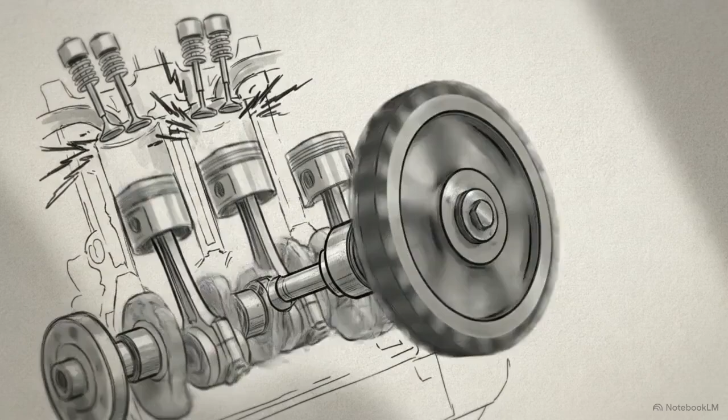For decades, automotive safety relied on cause and effect. A metal gear snaps, a brake line ruptures, the machine seizes, and a crash follows. Engineering standards, specifically the widely used ISO 26262, focused entirely on this chain of events. The logic was straightforward: prevent the parts from failing, and you prevent the accident.

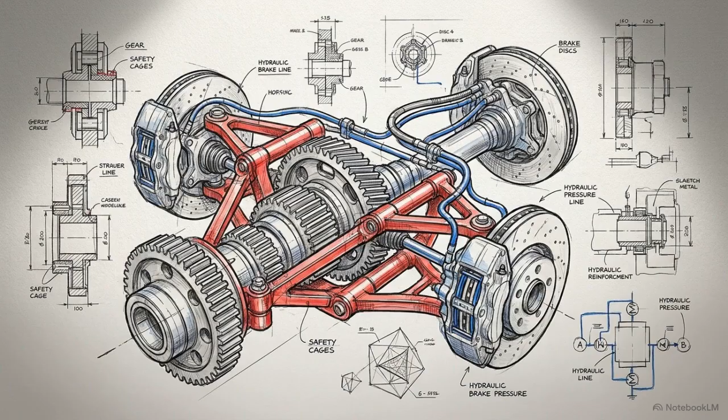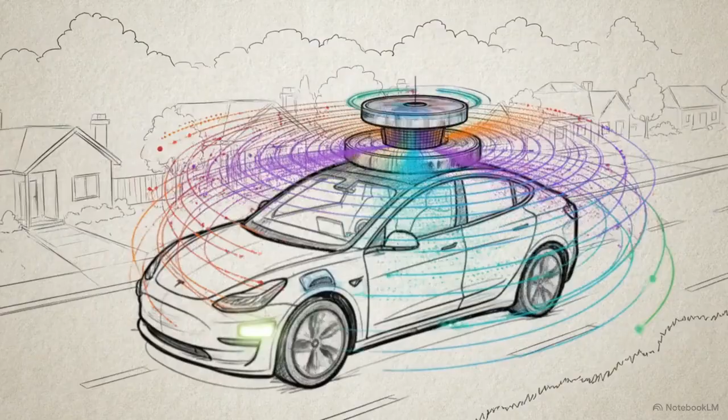But put an autonomous vehicle on the road, and that logic falls apart. You can have an engine in perfect condition, cameras streaming pristine 4K video, and LiDAR arrays spinning flawlessly, yet the vehicle still gets into a crash. Zero mechanical faults, zero electrical faults. The old rules of automotive safety simply cannot explain what went wrong.

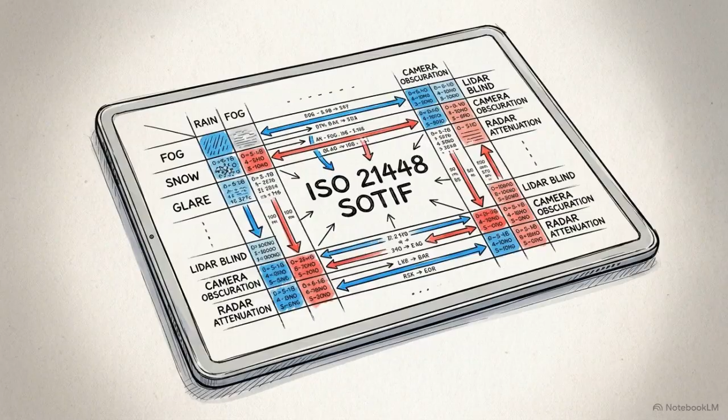This gap in logic required a new framework, called ISO 21448, better known as SOTIF, the safety of the intended functionality. SOTIF is designed specifically for situations where a system works exactly as engineered, but still fails due to a performance limit or an unexpected environmental trigger. Autonomous safety relies on ensuring a mathematically perfect system survives a chaotic, unpredictable reality.

SOTIF relies on a verification and validation framework, operating as a continuous cycle. Verification is defensive, proving the system handles known risks, like slowing down in rain. Validation is exploratory, using real-world data to hunt down unknown risks.

Whenever validation uncovers a new hazard in the real world, that data feeds back to the verification side to become a new design requirement. The entire framework operates as an ongoing search and rescue mission, systematically finding dangerous unknowns and transforming them into safe, manageable knowns.

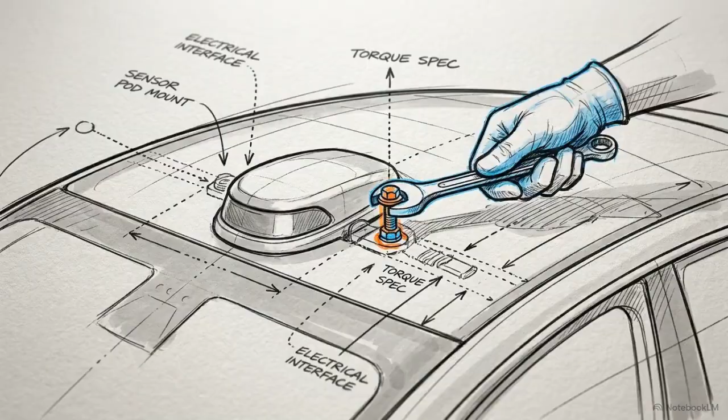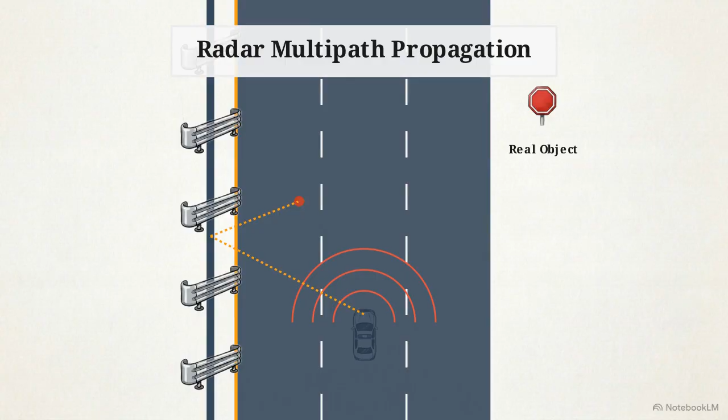Finding those unknowns requires testing the physical hardware. Every sensor on a car, whether a camera, a radar system, or a laser, is bound by the laws of physics. This diagram shows radar multipath. A radar wave bounces off a metal guardrail and reflects back. Because the signal took an indirect path, the computer hallucinates a ghost target in its own lane, triggering phantom braking.

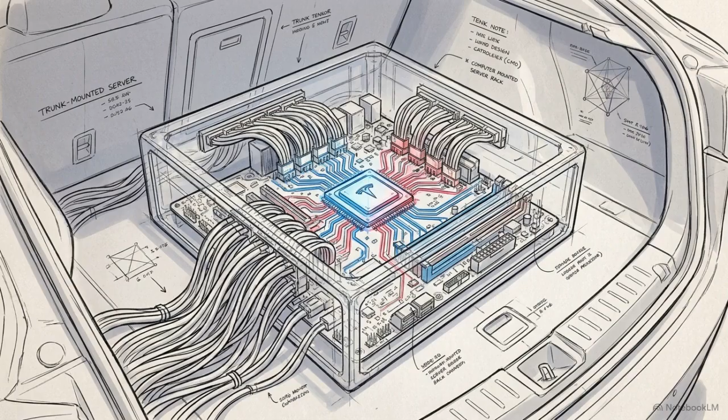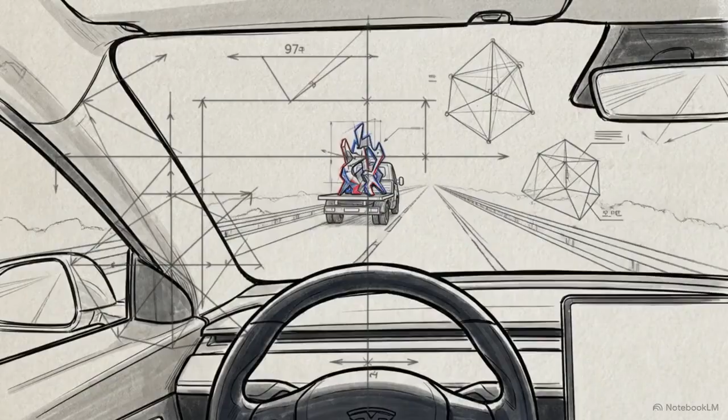These hardware limits are compounded by the AI software interpreting the data. Machine learning models are highly vulnerable to what engineers call confidence pitfalls. An AI might state with 99% probability that the path is completely clear, but if the training data lacked that specific rare object, the high percentage doesn't mean the computer is correct. It just means the computer is highly confident in its own mistake.

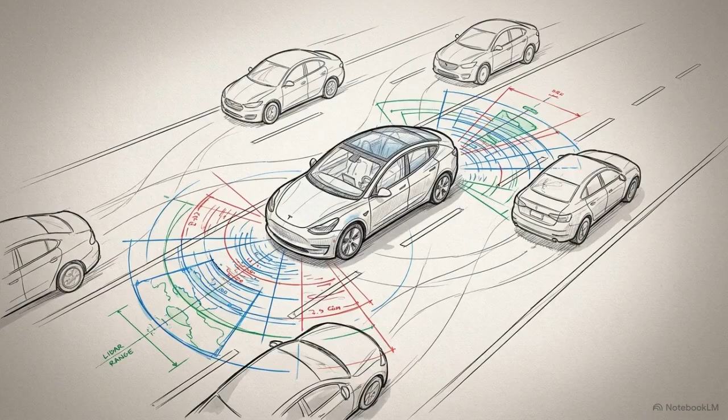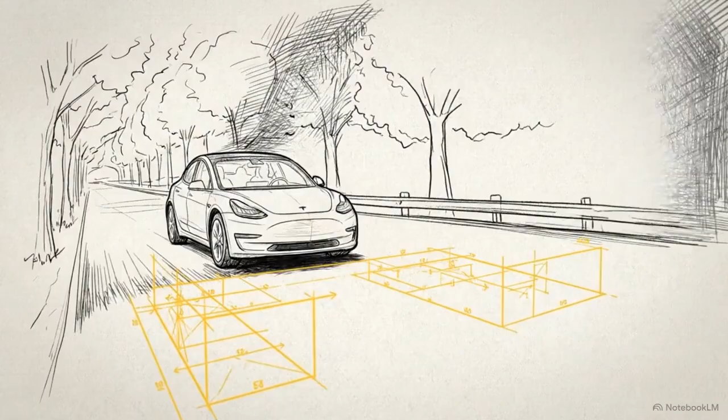When you combine bouncing radar waves with overconfident algorithms, the greatest danger to an autonomous system is its own misinterpretation of the physical world. To map out these misinterpretations, validators categorize extreme anomalies into two distinct buckets: edge cases and corner cases. An edge case occurs when a single operational variable is pushed past its physical threshold.

Think of a car driving into complete, pitch-black darkness. Because an edge case isolates just one extreme variable, the boundaries are relatively simple to define. Engineers can write a clear rule to handle it, like slowing down or safely pulling over.

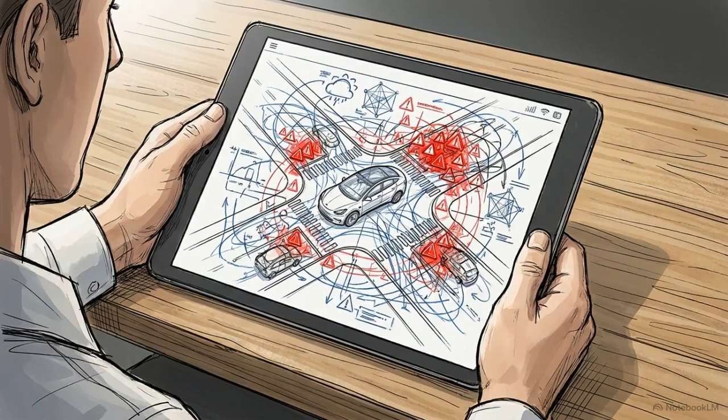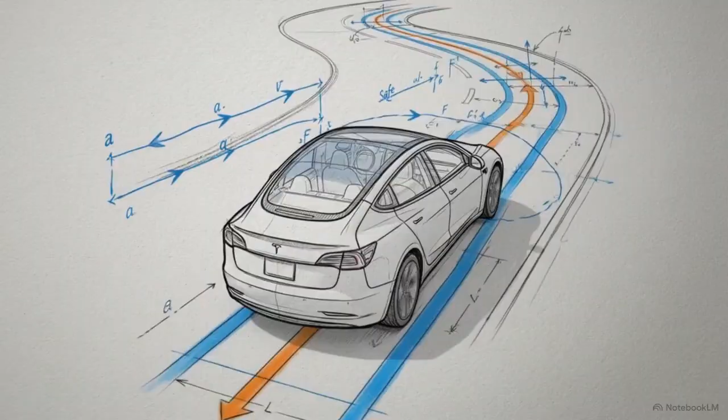All of this testing and categorization culminates in the final output of the Clause 9 process, the verification and validation strategy document. Engineers acknowledge that an absolute guarantee against every possible crash is scientifically impossible. Instead, the strategy provides a rigorous, evidence-based argument that the vehicle is safe within its mathematically defined limits.

Crucially, it functions as a living document. As the AI drives more miles and inevitably encounters new, undiscovered corner cases, the safety parameters must continuously evolve to absorb that new data. In the age of artificial intelligence, safety requires a relentless, ongoing commitment to mapping the unknown.